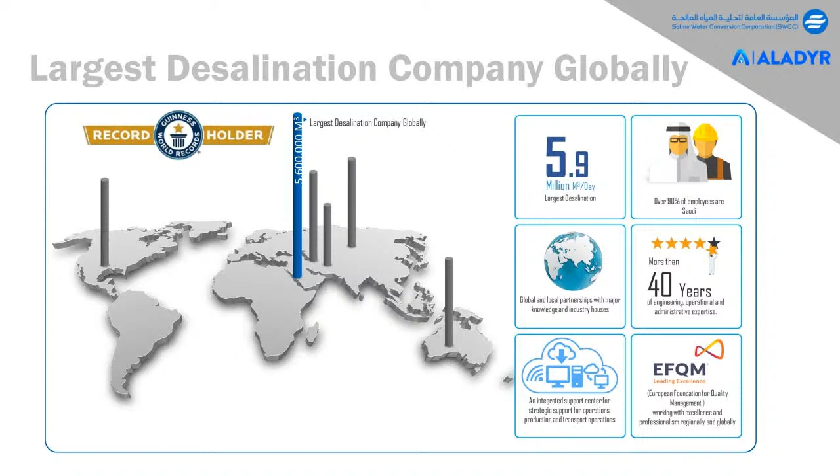This is the record Guinness for when we got 5.6 million meter per day, and now we are producing about 5.9. Now we have experienced more than 40 years in engineering, operation, and administration experience in the desalination industry, and we are a global and local partnership with major knowledge and industry houses.

The main strategic initiative for SWCC is optimization of desalination plant operation, in order for example to increase production. In 2018, we could increase production from 3.6 to about 5 million meter cube per day through several initiatives in the thermal and RO plants, and we could also reduce chemical consumption in the RO plant and thermal plant.

The other strategic initiative is development of new desalination technology and membranes. For example, we have patented several technologies, like using nanofiltration ahead of the RO, which we do as a pretreatment. And the last thing is development of the brine mining technology, what we are talking about today.

The DTRI initiatives in desalination: first, we are focusing on producing more fresh water from the same saline sources by increasing the high recovery from the thermal plant or RO plant. Second, advanced membrane technology and materials.

Now we are working with our partners on a novel membrane that could lead to higher production by about 10% compared to existing membranes available in the market, lower energy consumption by about 10%, and higher rejection compared to other membrane manufacturers. The rejection now ranges from 99 to 99.85, and with our new membrane we could reject about 99.93. This is a uniqueness from our work with partners in membrane technology.

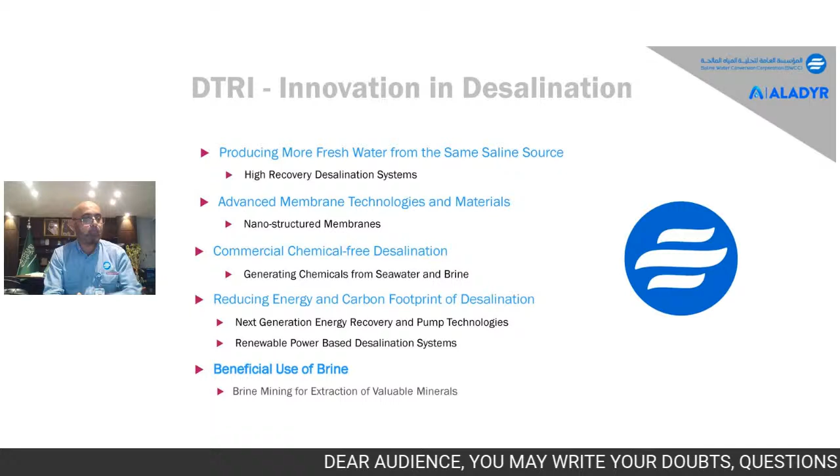As you see, the blue blocks show us the seawater. The seawater actually contains 95.5% fresh water, and only about 4.5% is salt. If we look closely at the 4.5% salt, it will be mainly chloride at 51%, sodium about 35%, whereas sulfate and others make up the remaining. Here we found the value for the minerals and salts available in the brine or seawater.

As you see, all SWCC plants, or worldwide plants, have a brine rejection of about 7% concentration that gets dumped back to the sea, and this is considered a waste. Now we could convert this waste into a treasure by increasing the concentration from 7% to about 25%, with a purity of 99.7%.

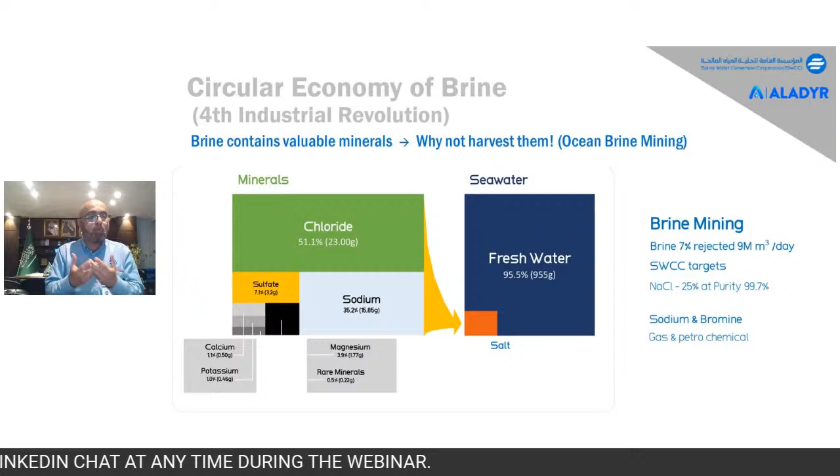I'm talking about the sodium chloride, and my colleague will explain in details, but that's our target. We can make the brine waste into a valuable material. For example, as I mentioned, sodium chloride, 25% with a purity of 99.7. And also we are harvesting bromine for gas and petrochemicals.

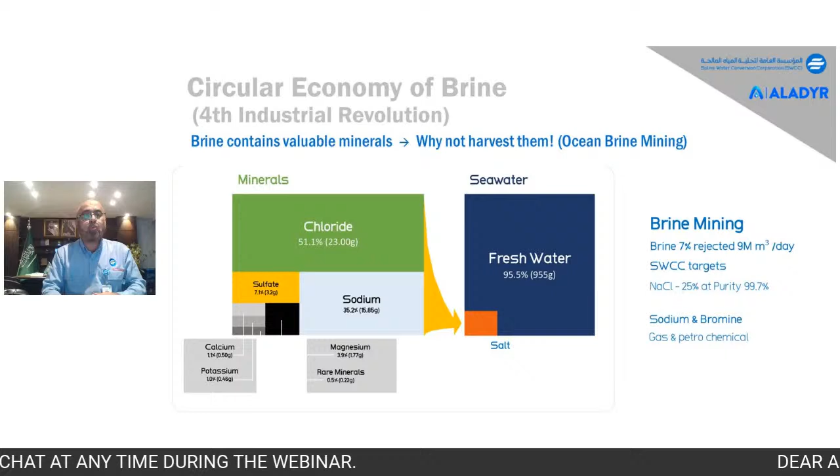For our area, we have SABIC, the biggest petrochemical industry in the world. They need the salt for chloralkali. They used to use landfill in order to extract this salt, but the landfill is not sustainable as what we have now from the brine. Now it's become more sustainable when we are harvesting the sodium chloride from the brine.

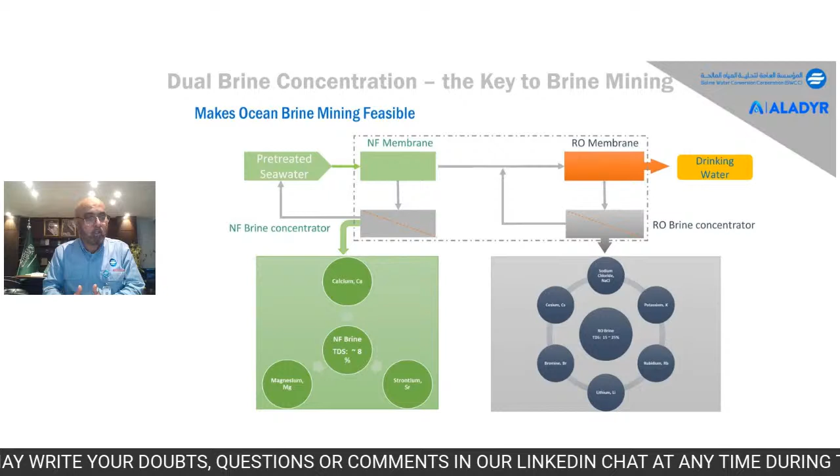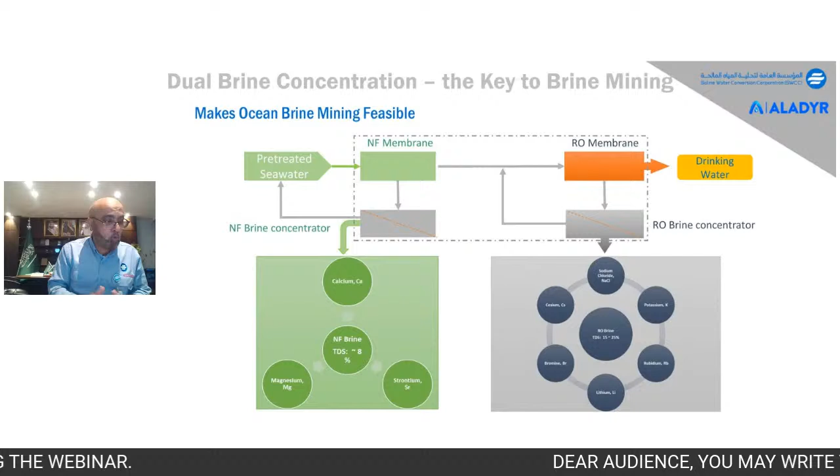Let us focus now on the advantage of having only the monovalent ion going to the RO, since we could increase the recovery for the RO membrane from 45 to about 55%. We have now 10% more recovery. Also, the brine we get from the RO membrane is mainly monovalent, sodium chloride, bromine, lithium, rubidium, and the other stuff.

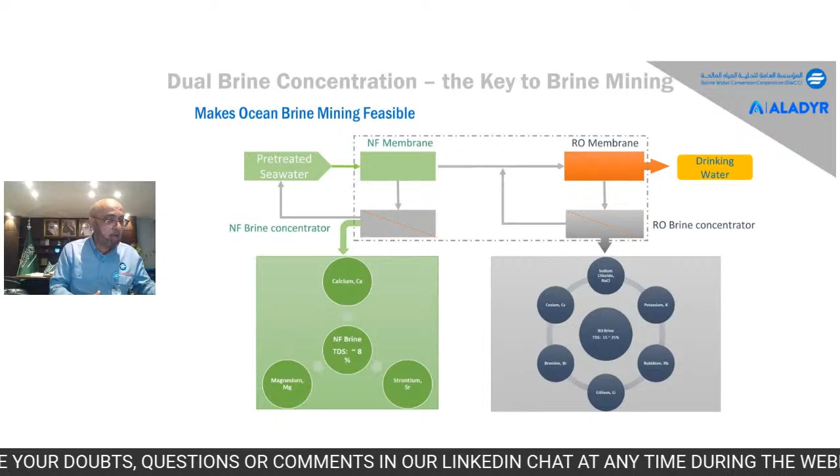Whereas when we go to the NF, the reject of the NF is mainly focused on calcium, magnesium, and strontium ions. My colleagues will talk about the calcium and magnesium harvesting, but I'm going to focus only on rubidium for the monovalent ions. Please, next.

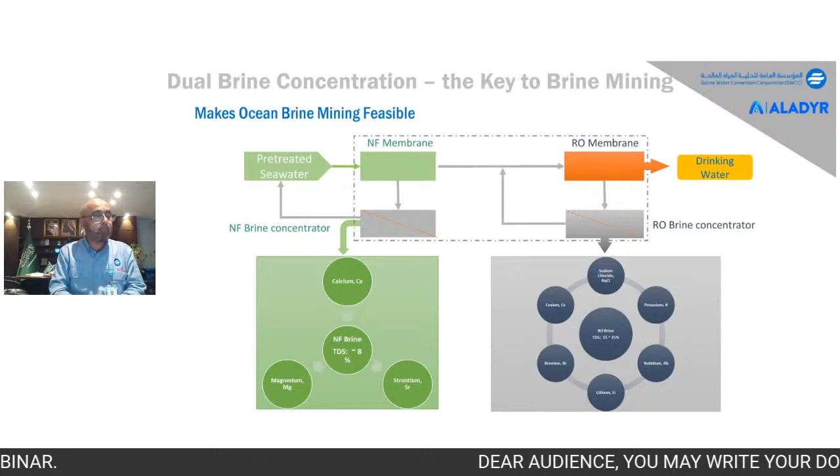For the rubidium, actually now we are working with... next please, sorry, next please. It's the previous, yes, okay.

Now we are working on a project developed in collaboration with the Oak Ridge Lab in the U.S. Department of Energy, in order to harvest the rubidium and put it in the cold fusion power reactor to produce clean energy. This will allow us to produce energy equal to 1.5 or 2 times the energy needed for operating the desalination plant. We believe the extra energy can be exported for household use, and we consider it a revolution in the energy sector because it is green energy.

We are using rubidium with no radioactive waste, and it will be one of the green, stable, and sustainable energy resources because it is from the brine. We believe this is the future of green energy, the bounty of the sea.

We are working now with our partners. We hope that within a maximum of 2 years we could generate power from this rubidium extraction.

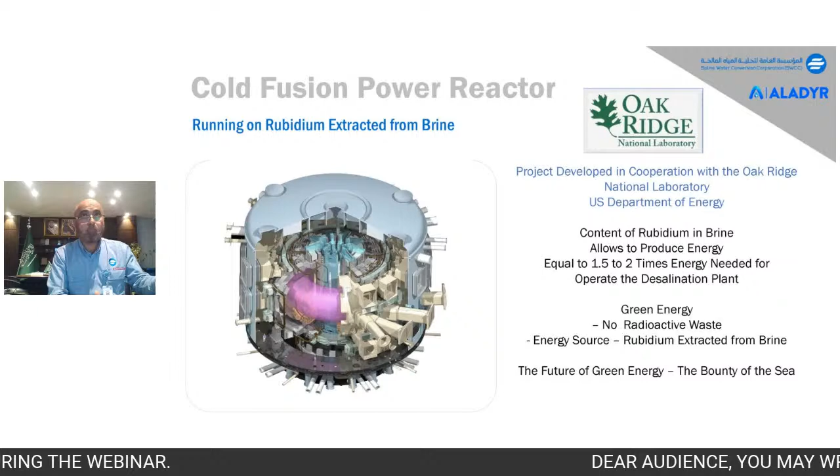Please, can you go to the previous one, please? To the previous one, not the next. No, the previous, please.

We are working on all this type of ion harvesting with our partners, like Hydronautics, Fitco, FTS company, a Russian company, and also the King Abdullah University of Science and Technology. All these are our partners, and also BWS, Pacific Water Solution.

We are working with Oak Ridge Lab in order to make this succeed. We have now succeeded for several projects, for several elements and metals, and our colleagues will explore what we are going to do, inshallah, in the future. Next, please, next please.

The next slide will show you that harvesting from the brine of the NF, the magnesium ions, could give a revenue of more than $160 million, and also from the other stuff, from the bromine, about $10 million.

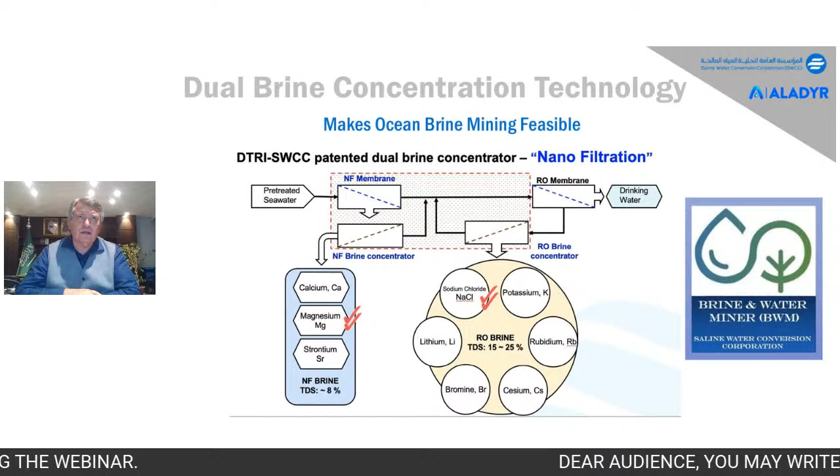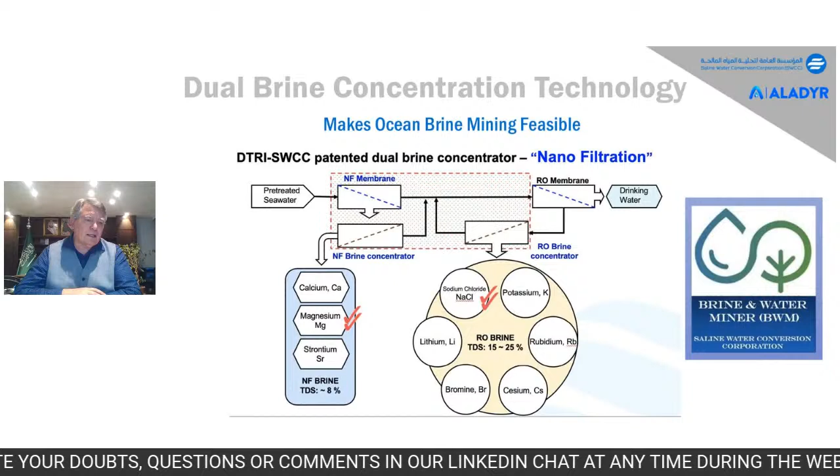From that point on, we treat the water through a conventional seawater reverse osmosis system, which allows us to produce brine that is mainly sodium and chloride, along with a few other minerals removed through the desalination process. This system, shown on the screen, is actually patented — it was awarded a patent later last year. This system is at the core of the design of the full-scale plant we plan to build in Jubail. It is connected to a new 1 million cubic meter desalination plant, also located in Jubail. This is one of the largest projects under development here with Saline Water Conversion Corporation. The brine from that facility will be used to produce sodium chloride and bromine for the chlor-alkali industry. Next, please.

Why do we focus on sodium and chloride? As you can see on this graph, it shows the various compounds present in reasonably large amounts in the brine. The line roughly in the first third of the screen shows that not all of them are cost effective. This graph shows that anything on the right side of the line is actually more cost effective today to derive from brine than from terrestrial treatment of sources of the same mineral.

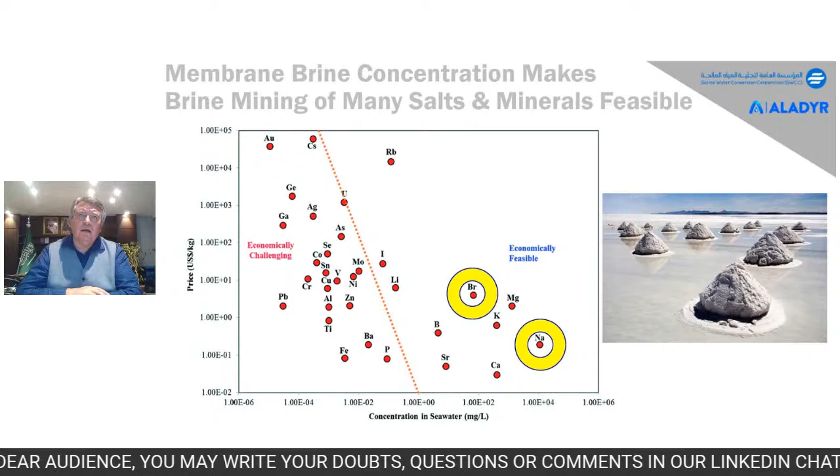And the higher we go on that graph, as you can see, rubidium is a very high value substance. And it's one of the big prizes that Dr. Alamoudi said is not only high in value, but also high in potential in solving the potential future of energy from desalination. The two minerals that I'll focus on are shown with yellow circles, and those are

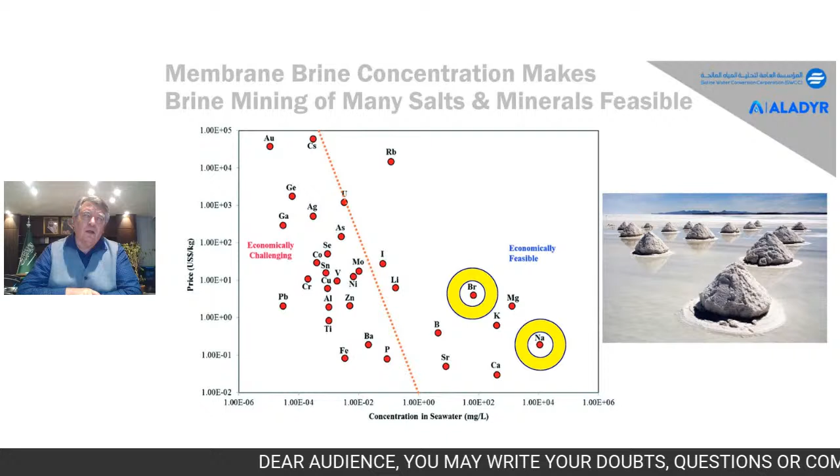sodium chloride and bromine. Sodium chloride is an important substance, and it's used in chemical industry worldwide by the chlor-alkali industry to produce sodium hypochlorite and sodium hydroxide. Bromine is a very important substance for any place where you have oil industry. It is injected in every single oil well as a fire retardant. So it is widely used in the Middle East and many other places worldwide where oil exploration is achieved.

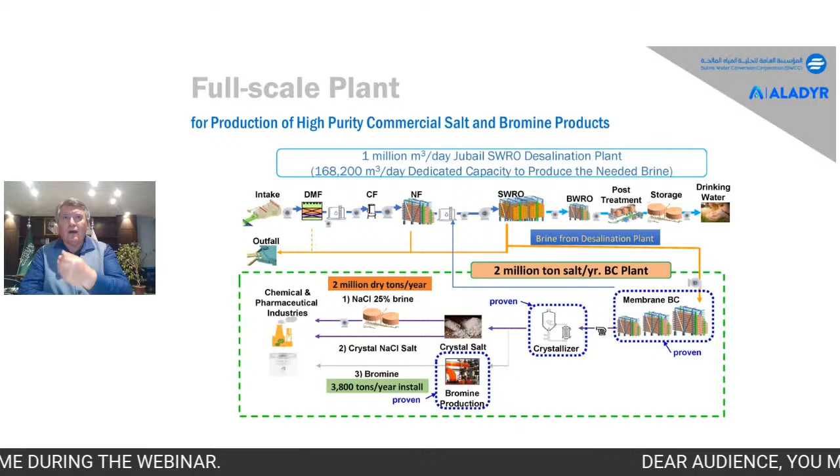The seawater reverse osmosis system will have higher recovery because of the pre-treated NF water. The brine generated from that system will be higher in sodium and chloride and lower in calcium and magnesium. That brine is harvested and goes into a multi-stage brine concentration system, which you can see on the right side of the picture.

The brine concentration system has the purpose of taking the 70,000 milligrams per liter brine and concentrating it to about 232,000 milligrams per liter. This is done by osmotically assisted reverse osmosis, a 3-stage system that operates at low pressures, not as high as the pressure of reverse osmosis. It's very simplified compared to many other systems available on the market.

That allows us to very energy efficiently and cost effectively produce brine at 230,000 milligrams per liter. That brine at that concentration goes into a crystallizer because most of our clients prefer, rather than carrying brine with water in it, to actually crystallize and use it as crystal salt. So that's how we produce the actual brine in crystal form.

We'll also have it in liquid form. We do have one user very close to us, and the brine will be pumped to them directly by pump station. What else comes out of the crystallizer, in the waste or purge from the crystallizers, is actually a stream very rich in bromine that normally would be wasted, as happens in zero liquid discharge systems. In our case, it's actually a very valuable resource of bromine.

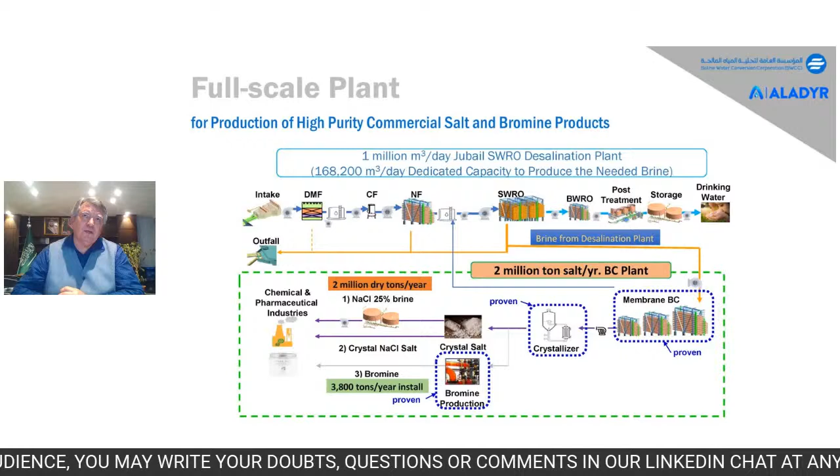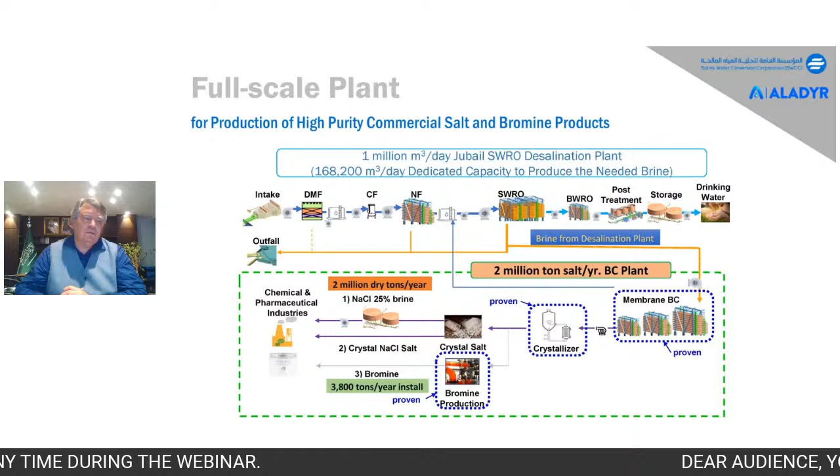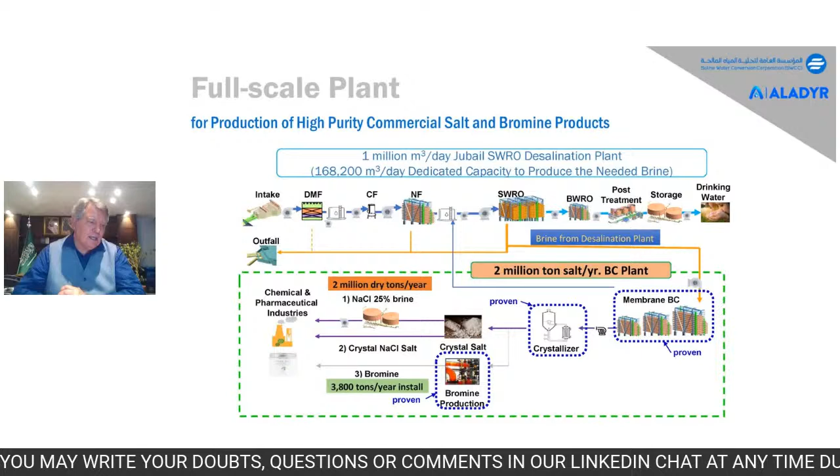We're using a technology that allows us to extract the bromides from this liquid and turn it into bromine, which is a highly valuable commercial product for the chemical industry. As a final product of this plant, we will have 2 million tons per year of high purity salt, sodium chloride, that can be used for the chlor-alkali industry, and about 3,000 to 4,000 tons of bromine per year that will be used for the oil industry.

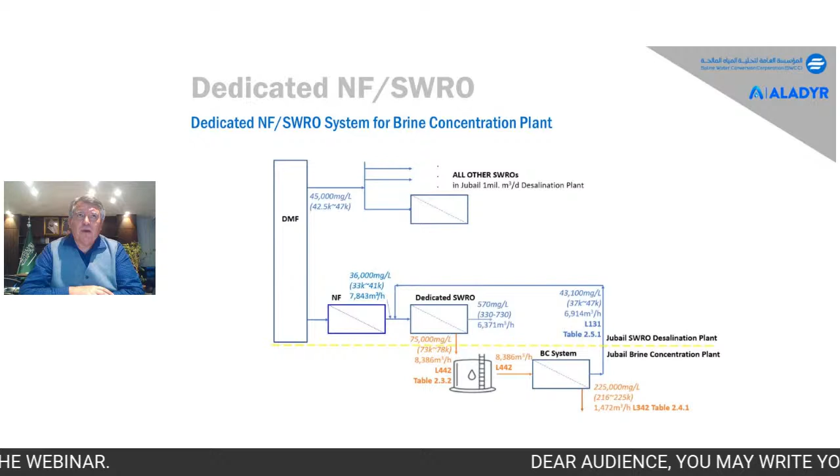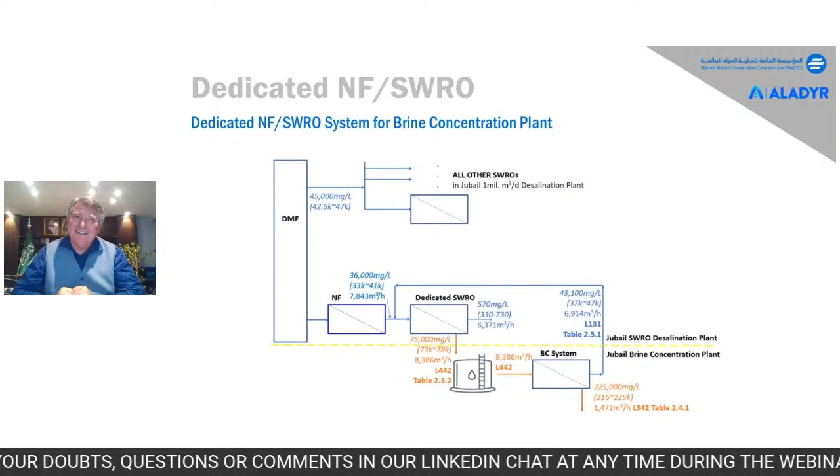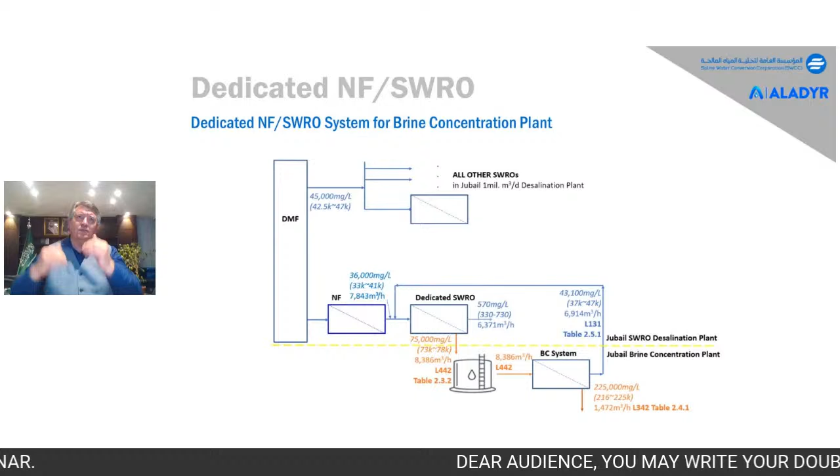The main difference between brine concentration membranes and seawater reverse osmosis membranes is that brine concentration membranes are designed to concentrate brine, and the permeate they produce is actually pretty close to the salinity of seawater, not drinking water - that's a big difference. That permeate is almost 99.6% pure sodium chloride. Recycling and recovering that stream is very valuable in reducing the overall energy and increasing the overall productivity of the system.

Once we do that, the brine that comes from the reverse osmosis system will go into a storage tank, and from there into the brine concentration.

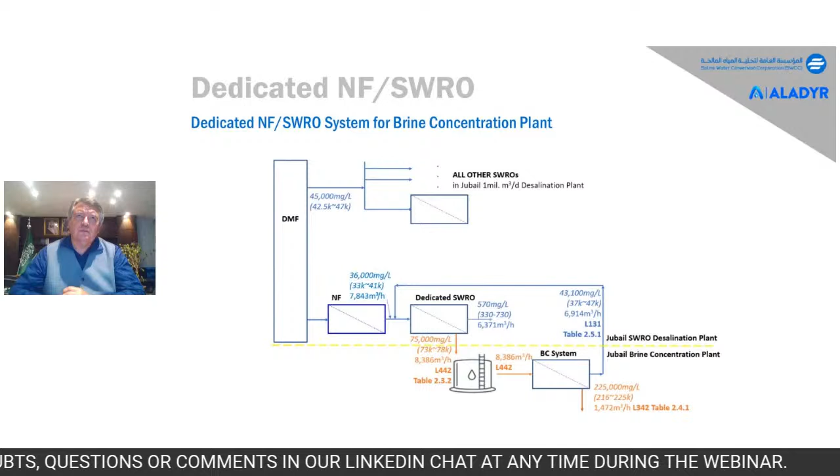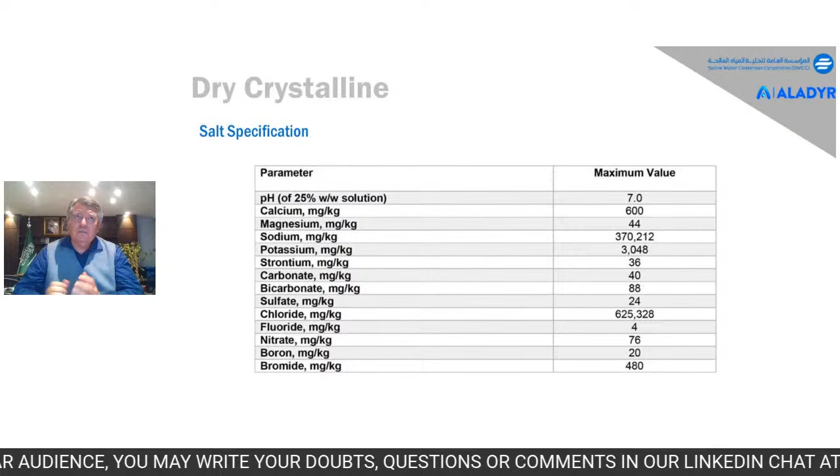Next slide, please. This is the dry crystalline salt specifications. Those specifications are determined by the chlor-alkali industry. You can see what spec we're meeting. We could be even more stringent as far as quality, but this serves basically any chlor-alkali industry use of this brine, and also medicinal, pharmaceutical, and other industry uses. Just to see what the product looks like. Next slide, please.

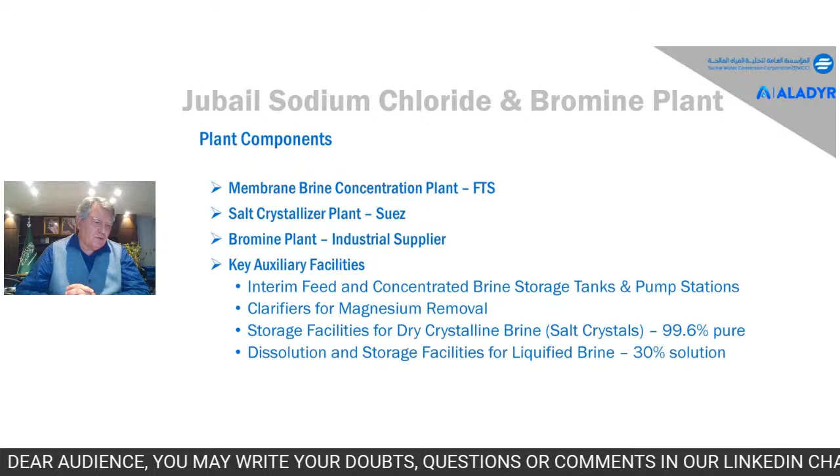The bromine plant is basically provided by an industrial supplier - a fairly readily available commercial facility. Besides the bromine and salt crystallizer, we have interim feed and concentrated brine storage tanks, pump stations, and clarifiers for magnesium removal. The brine tends to change in quality because seawater changes in quality as well, so we use the clarifiers to remove extra magnesium in summer when membrane rejection is not as high. Then we store the brine in liquid form.

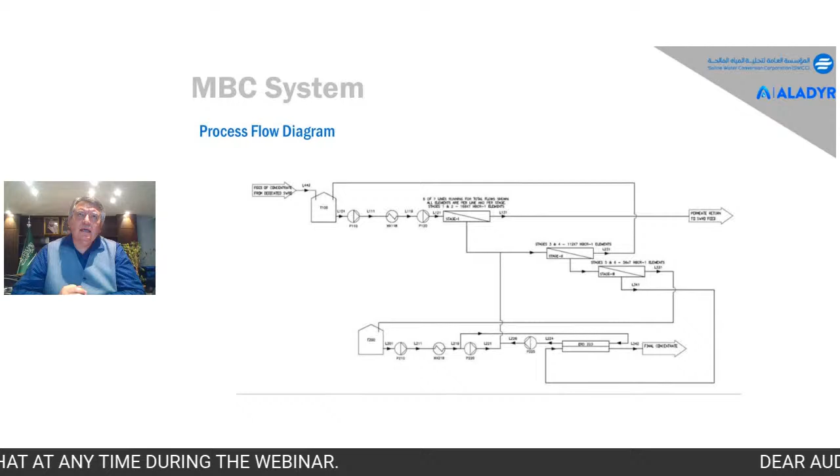This is the membrane brine concentration system, just a general schematic. I'm not going to go into detail - you're very welcome to come to our one-day brine concentration conference workshop, where for one day we'll talk in excruciating detail about the chemistry, technology, and details.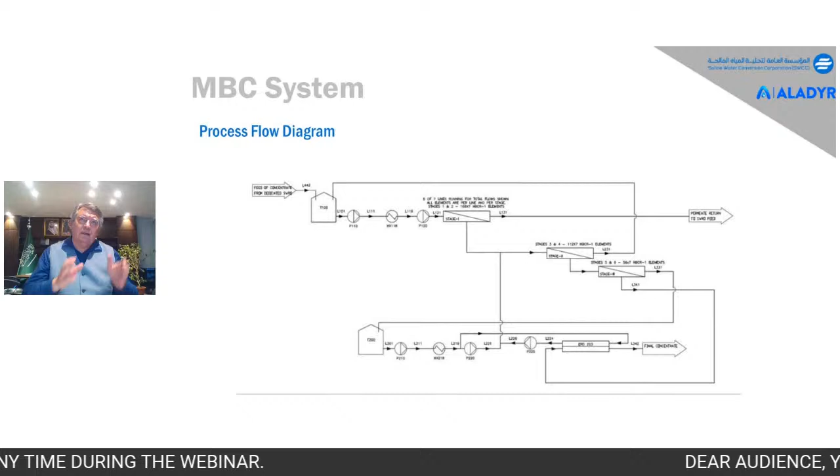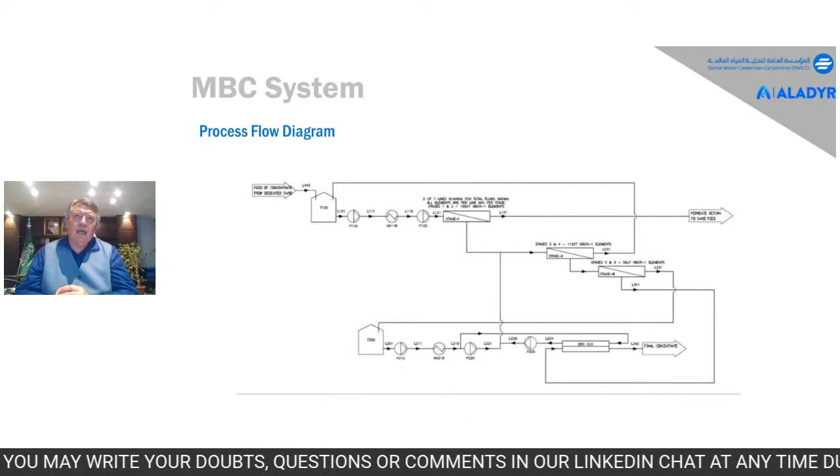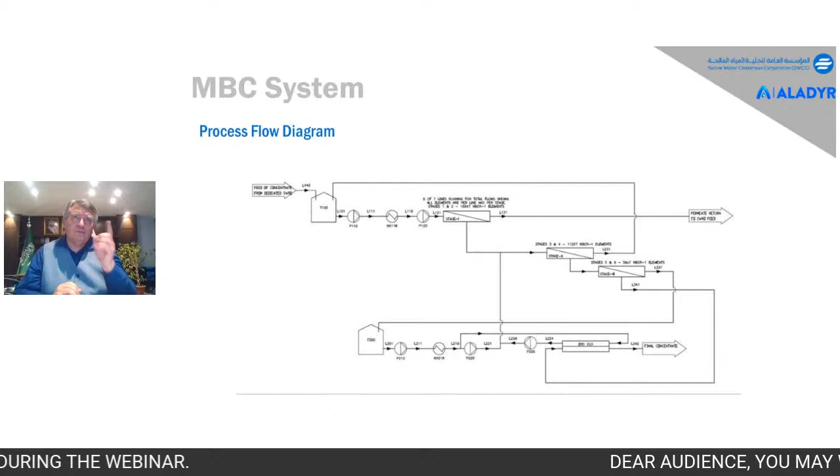This is basically a three-stage system where we treat the brine to concentrate it. From stage to stage we increase the salinity: feeding at 70,000, we get to about 150 to 180,000, then to 230,000, and with the third stage we could get to 280,000 milligrams per liter. The permeate from each brine concentration stage is recycled to the front, while the permeate from the first stage is recycled to the feed of the seawater reverse osmosis system.

Next slide. The crystallizer system - I wanted to mention that particular system. We selected a different system from the ones used in zero liquid discharge systems, because we wanted to create high quality dry crystals suitable for the chlor-alkali industry.

We are using specific SWCC technology, which allows us to meet all our targets and also produce high quality bromide that we could extract and convert to bromine for the benefit of the bromine industry. The crystal salt we produce is 99.6% purity sodium chloride, 6,000 tons per day - that's 2 million tons per year. We also generate about 30,000 m3/d of low salinity condensate that can be reused. In addition, we create about 3,780 cubic meters of purge with high concentration of bromide, which then goes through a bromination process to turn into bromine, a commercial product used in the oil industry.

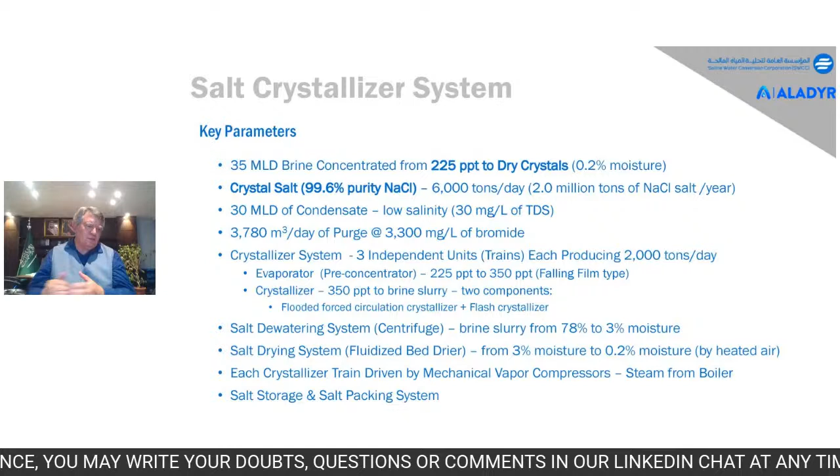The crystallizer system has 3 independent units with a pre-evaporator, pre-concentrating the brine from 230,000 all the way to 330-350, and from there crystallization into fine size 0.2% moisture crystals. We also have dewatering and drying components, including a fluidized bed dryer, as part of the crystallization system. We run the crystallizers using steam and mechanical vapor compression, and we also have salt storage and salt packing systems as part of the project.

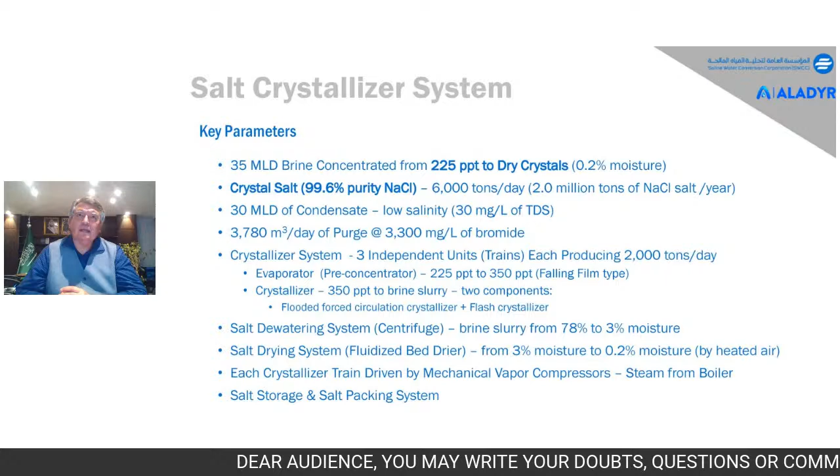Next picture, please. Next slide.

The next steps of this project are: we've completed the front-end engineering design of the project, and we are currently securing the funding of the project. We expect that to be completed within the next 2 months.

And then we have a project workshop that I mentioned in our brine mining conference, on March 21st. You're welcome to attend, and it is included in the price of the conference, which is very reasonable.

From that point on, we will get into preparation of requests for proposals and issuing proposals this summer and fall, and have a turnkey contractor design and build the facility to great detail. Then a construction period of about 36 months, with expectation by mid-2025 to have this 2 million ton per year plant in operation. This will be the largest facility in the world that makes this type of brine.

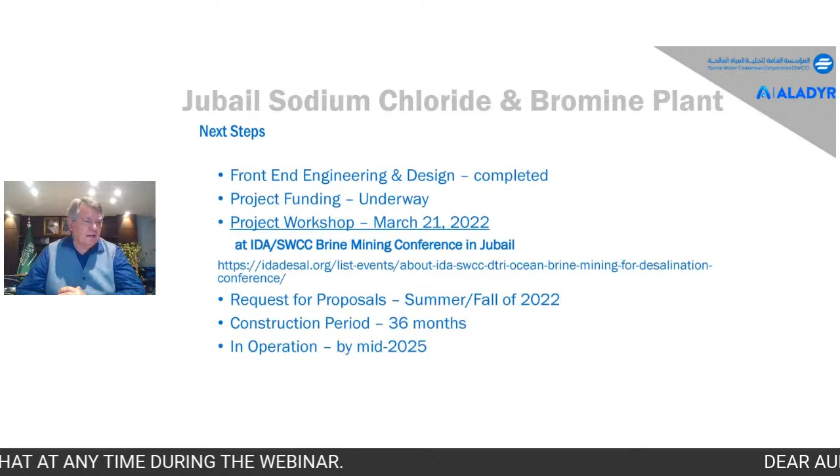Next slide, please. With that, I'd like to thank you for your attention, and to remind again that the Ocean Brine Mining Workshop is on the 21st of March. If you're interested in learning more technical details, we have a one-day workshop associated with that.

So with that in mind, I'd like to invite you to visit us here in Jubail, where you'll also be able to see the actual pilot system being used to verify the performance of the full-scale plant. Thank you very much for your attention, and we will continue with the next speaker.

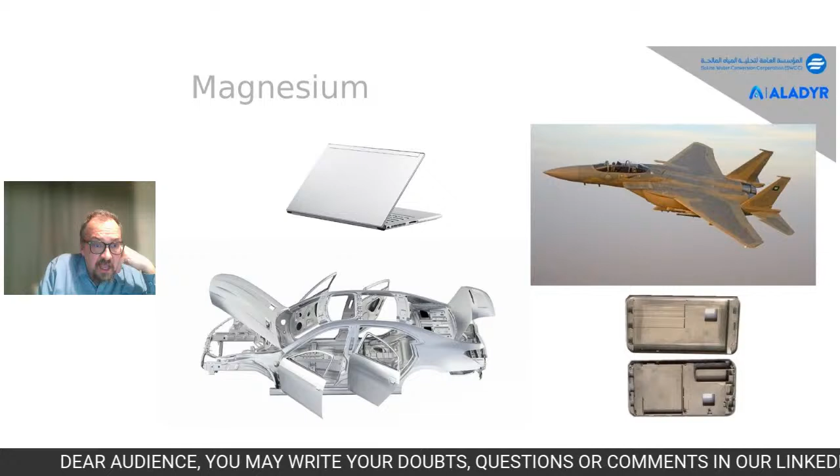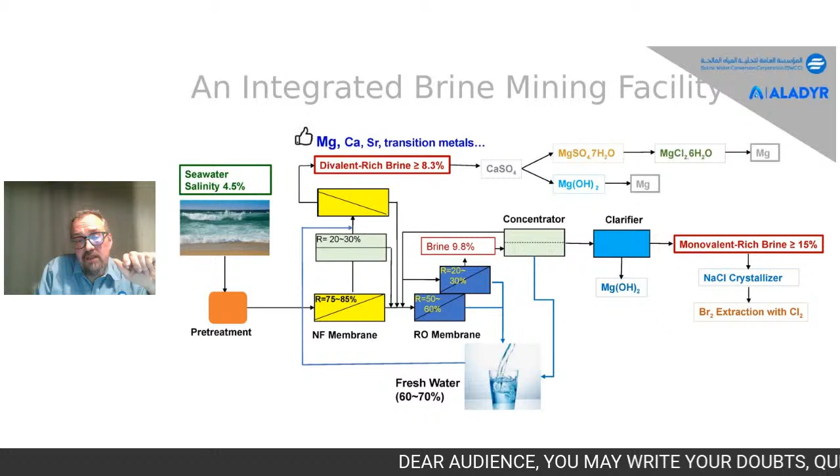So our integrated brine mining facility, on the next slide—Engineer Voutchkov has talked about how we're going to produce sodium chloride and bromine from this—but we also have another stream we haven't done anything with yet, which is that divalent rich stream, the reject from the nanofiltration membranes. Now this is a potential source for magnesium metal and for these valuable magnesium salts.

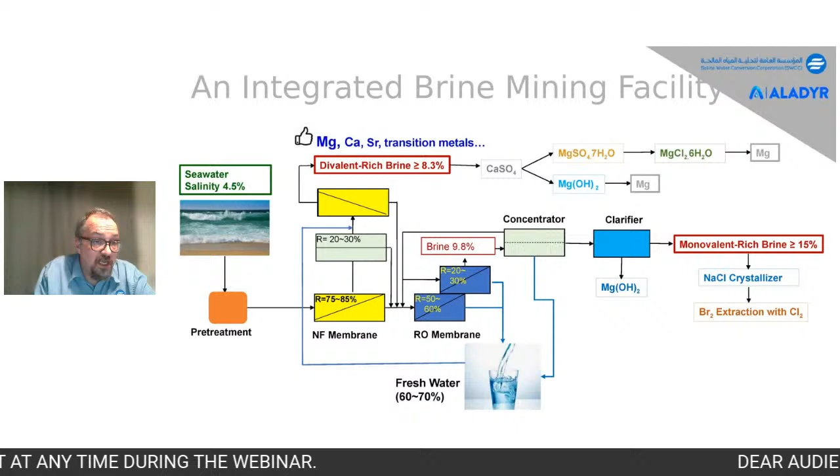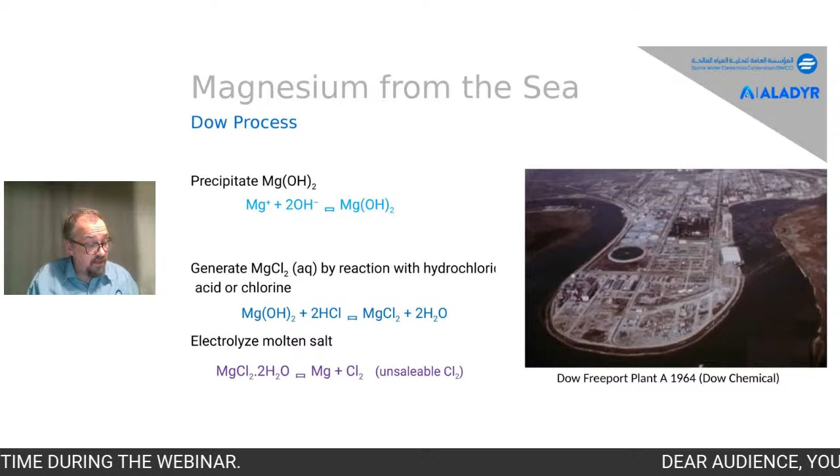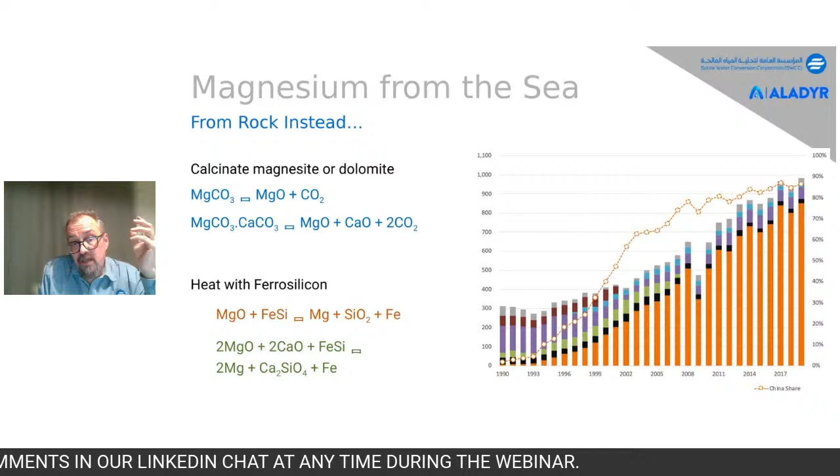There is a similar process which was also applied in many parts of the world throughout the 20th century. But since the late 1990s, these processes of getting magnesium from seawater have been almost entirely replaced by a much more polluting and energy intensive process that makes magnesium from terrestrial sources.

So the question is, how can we match the low energy, low cost of these processes used to produce magnesium from the land? We don't want to add large amounts of reagents, as in these historical processes, to precipitate magnesium hydroxide. We don't want to put in large amounts of energy if we can possibly help it.

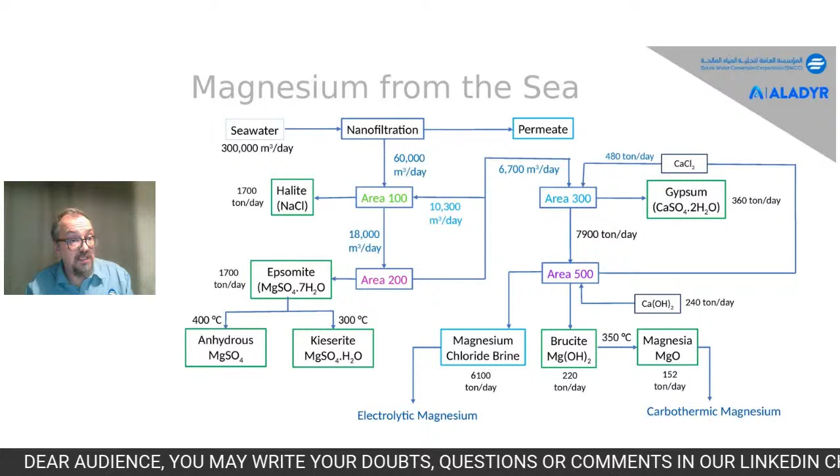And it's also possible that we can economically produce magnesium metal from the magnesium chloride brine that is potentially produced from the nanofiltration stream. So this is our low chemical impact design that we're working on at the moment for extracting as much value as possible from the nanofiltration reject. And the magnesium metal, if we have an interested partner, is obviously an ideal product there.

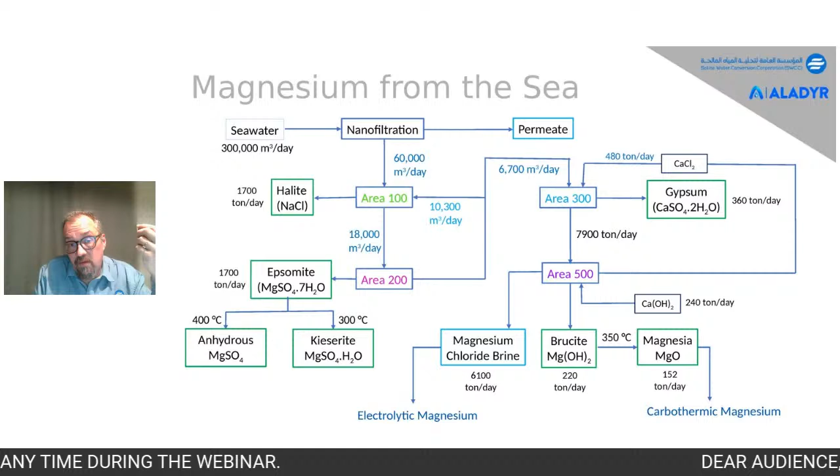Other products for which there is a significant market are the magnesium sulfate salts. The various forms shown there are quite valuable fertilizers. And in the next presentation, Dr. Eam will be telling you about a slightly different take on magnesium sulfate that we're actually implementing at the moment.

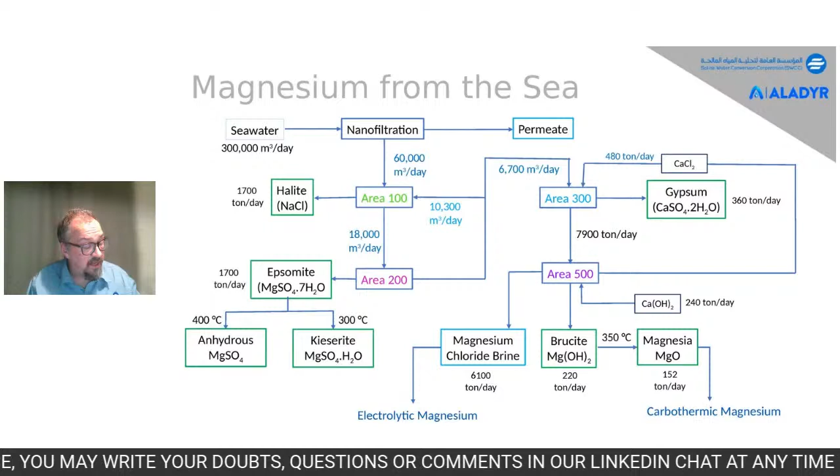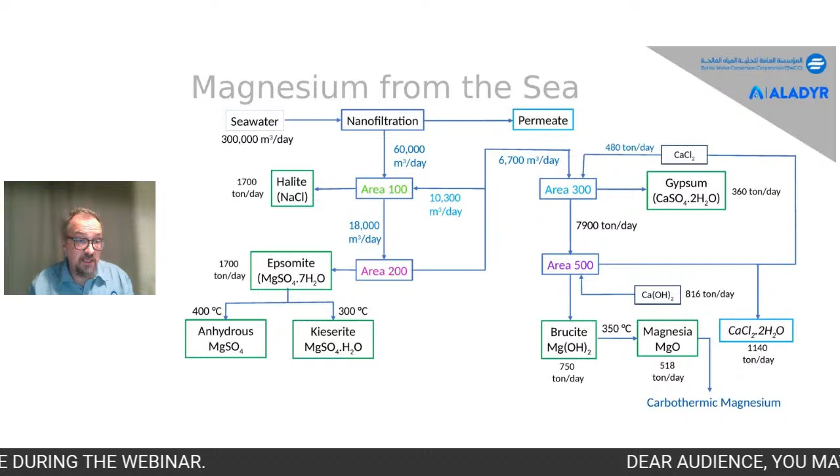So this plan maximizes magnesium chloride output. The next slide is a slightly different proposal for maximizing production of magnesium hydroxide for production of carbothermic magnesium. And we're currently talking with various people to identify the best path forward to produce magnesium.

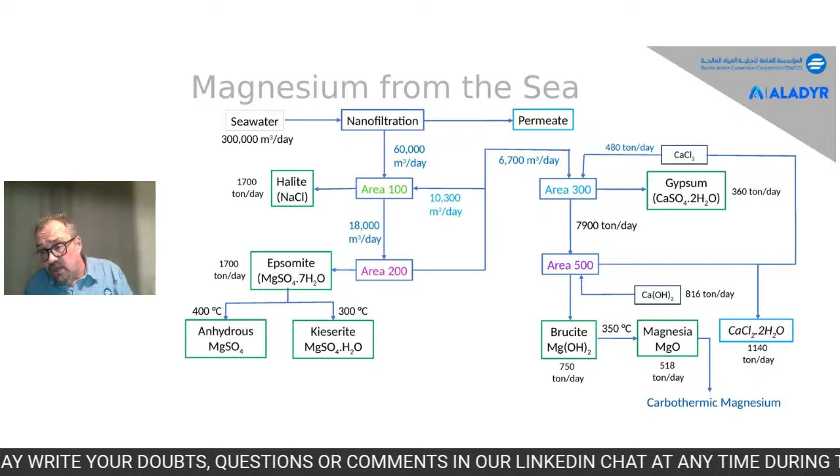So I have a little bit of time, despite the technical difficulties, to tell you about some of the other things that were significant on that graph. And the first one is potassium salts. Potassium is also valuable as a fertilizer.

Currently in the Kingdom of Saudi Arabia, we have no internal sources of potassium fertilizer. It's all imported from Jordan. And the output of our 2 million tons per annum sodium chloride plant will very neatly match the demand for potassium fertilizer in the kingdom. It could be reacted with the magnesium sulfate that's produced to produce potassium sulfate, which is a higher value fertilizer than potassium chloride.

Dr. Alamoudi spoke briefly about rubidium. So this is the actual technology that will use rubidium is still very much hidden away in the dark labs of the U.S. Department of Energy. But if these do become commercial, or even have significant use in government applications in the kingdom, then this future market for the rubidium 87 isotope will be very good for us. This can be extracted from the purge.

So I should have said about the potassium chloride, once we take the bromine out of that concentrated purge that's left over, it's a very good source for potassium chloride. What's left over after that is quite significantly enriched in rubidium.

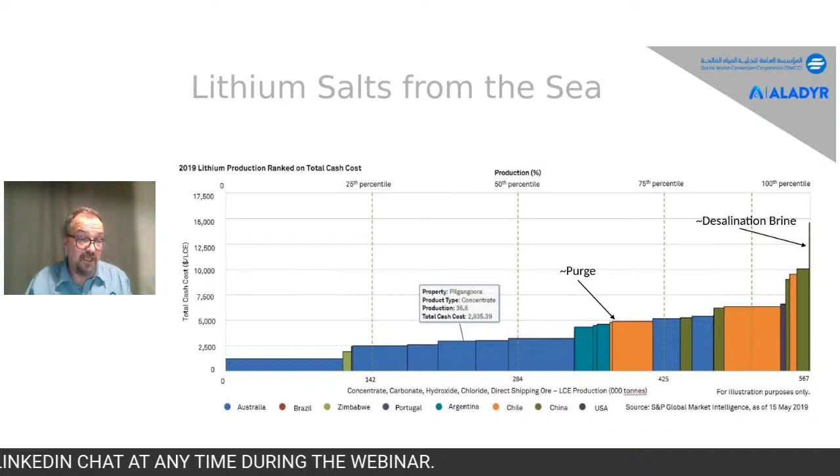So to summarize, we have an exciting future in front of us on the final slide. And we're taking the realizable parts of Thomas Midgley's vision. We're quantifying them and finding the parts that are going to be cost effective for us. The most important thing is separation. Any separation process requires energy and money, and having the nanofiltration at the front end gets us a lot of separation bang for a small energy buck.

And having everything integrated makes things economic that otherwise would not be. So if we didn't have a market for the sodium chloride, it wouldn't be practicable to look into all of these other products.

The sodium chloride is carrying the burden of everything else. And finally, for products like magnesium and rubidium, strategic considerations are important. It's likely that we will have a situation where it might not look perfectly competitive on a pure economic basis, but considering that more than 90% of the world's magnesium, and now the world's only operating rubidium mine, are controlled by China, I think there's an interest in getting those commodities from the sea, which touches nearly every country in the world. Thank you very much.

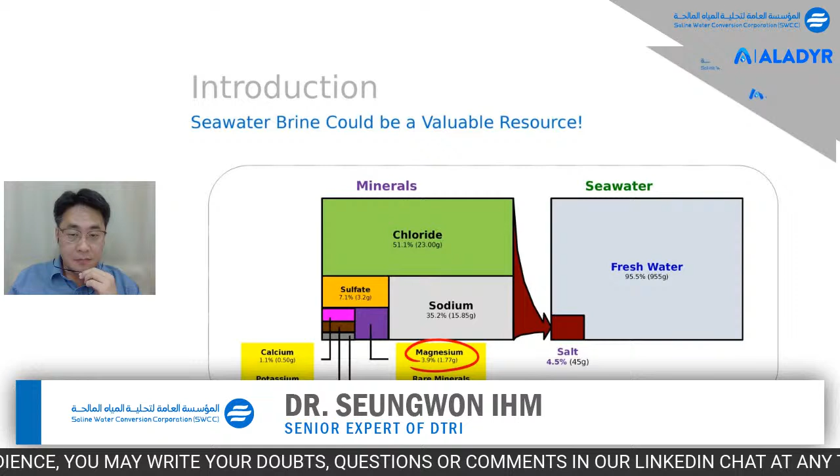Can you see my screen? Okay. Yes, we can see your screen, your presentation. Next slide, please.

As explained before, why magnesium? We found that during the last more than 20 years, in the medical society there has been a lot of study on the impact of magnesium dissolved in drinking water on human health. We found that the magnesium content in drinking water is very essential, very important for human health, especially on two aspects: one related to healthy heart muscle, and another for combating diabetes.

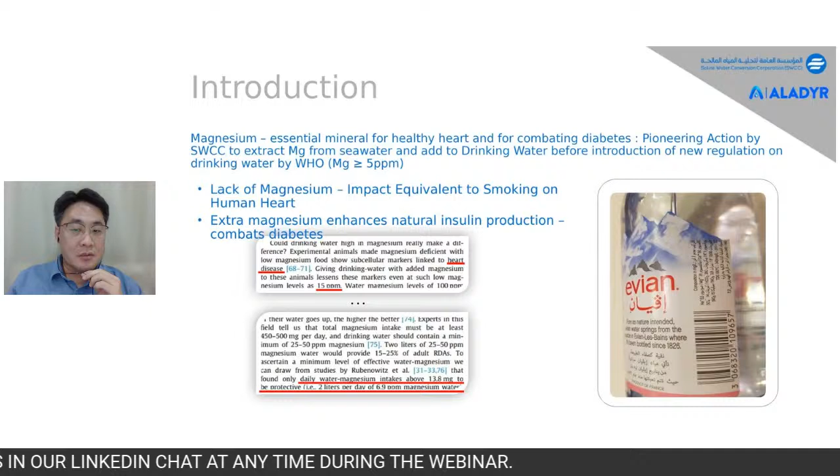Depending on the researchers, they found that the minimum magnesium content in drinking water, for some aspects 10 ppm, or in other cases 20 ppm, is essential. Next slide, please.

So how can we extract magnesium? Fortunately, in seawater we already showed that magnesium is the number 4 most abundant mineral available. So when we have a seawater desalination plant, why don't we extract the required magnesium from the seawater? In the Middle East, usually there is 1,500 ppm magnesium in seawater, and we need only 25 ppm magnesium in our drinking water. So we considered using nanofiltration in this application.

Nanofiltration is very special. Sodium chloride, such monovalent ions, mostly pass through the membrane, while calcium and magnesium, the divalent ions which are very important for our health, will be rejected by the NF membrane. Unfortunately, the NF membrane behaves as shown on the lower side of this diagram.

Although we want a certain ideal NF membrane which has zero rejection of sodium chloride, meaning sodium chloride moves with water molecules, in the NF reject where we want to harvest calcium and magnesium in a highly concentrated manner, we still have sodium chloride remaining. So how can we reduce the sodium chloride in the NF reject, so we don't put sodium chloride into our drinking water? We want to inject only calcium and magnesium. Next slide, please.

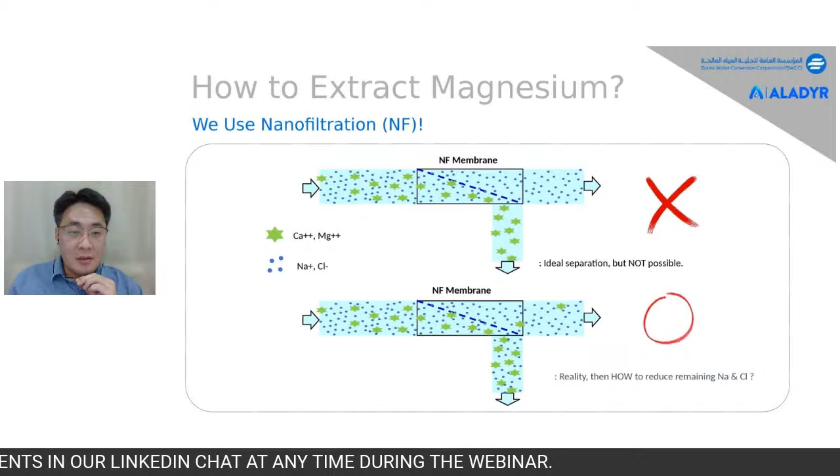We wanted to demonstrate our idea in a real commercial plant, so we developed our project over the last 2 years, and we are implementing this new NF system in the Shoaiba Phase 4 plant.

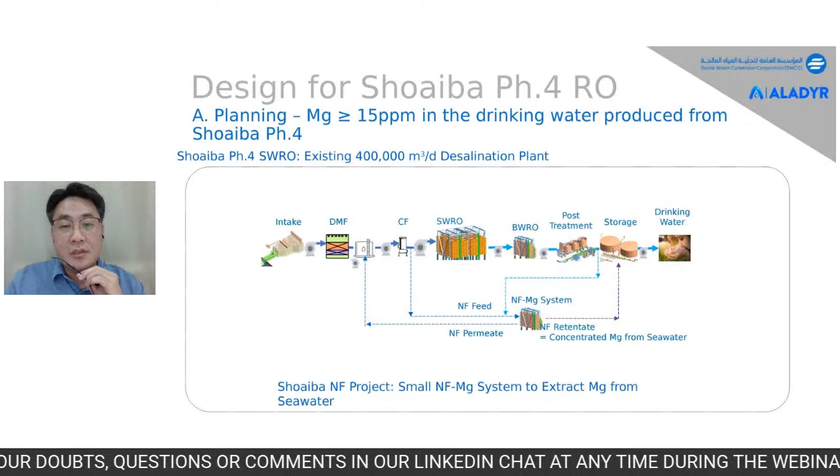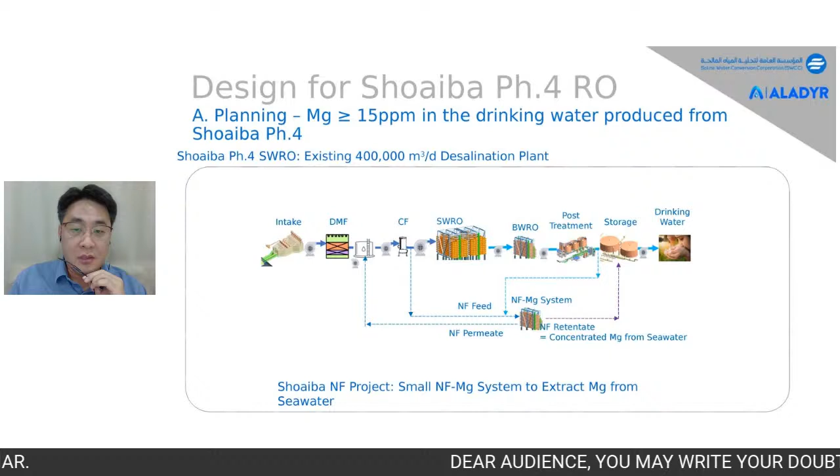We had to carefully choose the type of NF membrane. In DTRI, we have the NF membrane's performance data in terms of each individual ion rejection for more than 20 different NF membranes. NF membranes could be very tight, which is group A.

This is more close to the BWRO membrane, which shows very high rejection. While there are very loose membranes in group C, we tried to find something between group B and C, so that our final NF membrane shows less than 20% sodium and chloride rejection, while keeping a high enough magnesium rejection around 80%.

Next, what will happen in our drinking water? The left-hand column shows the Shoaiba Phase 4 product water design condition.

Usually in seawater desalination, the post-treatment adds hardness by calcium carbonate. So here you can see calcium carbonate, calcium and bicarbonate, but unfortunately, from the desalination plant using either RO or thermal processes, magnesium is usually almost 0 ppm.

In the column in the middle, you can see the magnesium-enriched brine from our multi-stage NF system. Here we can concentrate magnesium to more than 7,000 ppm, while sodium and chloride are minimized.

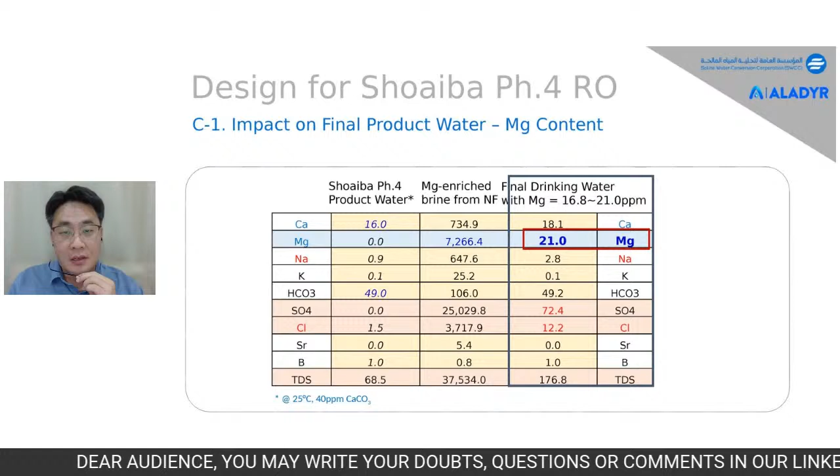After mixing this NF reject with our product water, our target design at 25 degrees Celsius was to secure magnesium at 21 ppm. At higher temperature and after certain membrane aging, this could drop to 17 ppm. But still, this is good for health, because our target was magnesium 15 ppm.

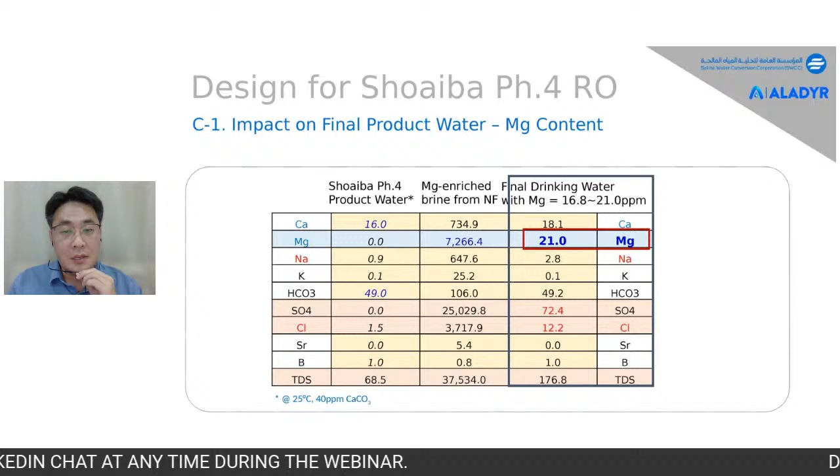Then the impact on Shoaiba Phase 4 water production. In the original design, as a reference, the feed TDS to the seawater RO system was 42,800 ppm.

But when we mix with our NF permeate, which is 13,000 ppm, the seawater RO feed TDS drops to 42,200 ppm, 600 ppm lower. Then we can actually increase the seawater RO recovery from 42% to 42.8% with similar feed pressure of the high pressure pump to the seawater RO.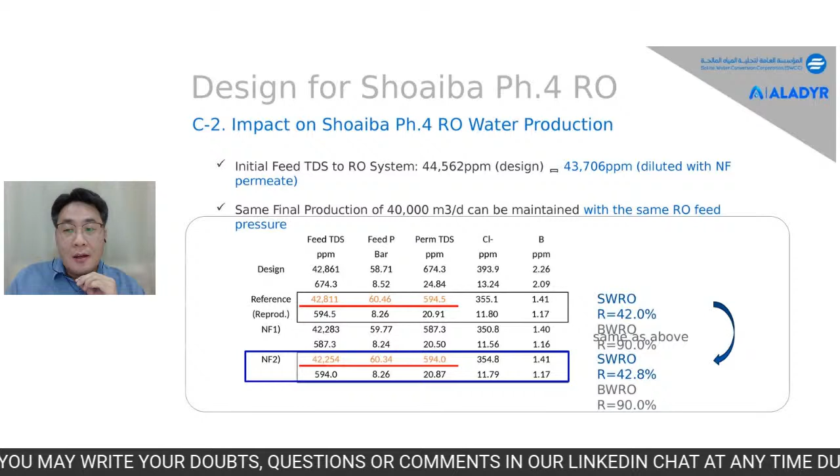So in this way, we can produce 0.8% more recovery, and this additional water production is actually used for our NF multi-stage interstage dilution water, so that although we use dilution water in our NF system, there is no loss in the final product water.

This is the overall scope of supply for our NF system. The overall size is less than 50 meters by 50 meters. We use filtered seawater as a source of magnesium, and product water as a source of interstage dilution, and most of the flow rate is sent back to the DMF filtered water tank.

The energy consumption in our system is around 1 to 1.5 megawatts, which is less than 2% of the entire Shoaiba Phase 4 seawater RO plant.

So the overall scope of our NF system, comparing to the Shoaiba Phase 4 seawater RO plant, is between 2% to 5% in terms of energy consumption, flow rate, or required footprint.

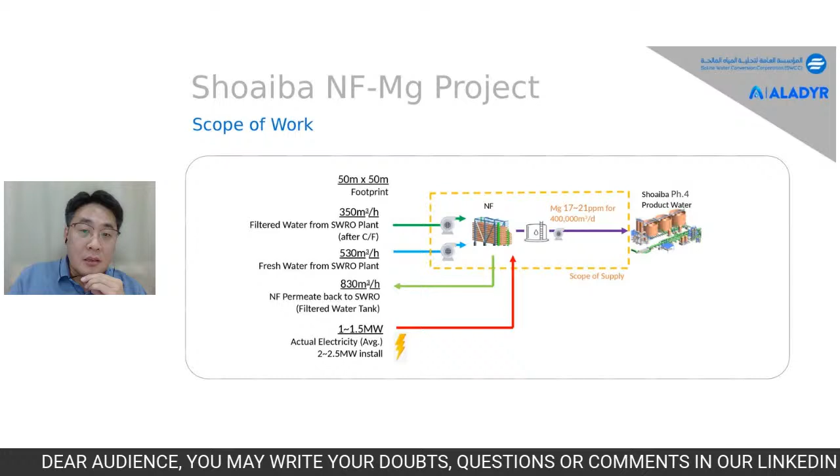So we can say that the possible increase of product water cost for our drinking water will be around 3 to 4% order. With this 3 to 4% additional cost, we can have magnesium in our drinking water.

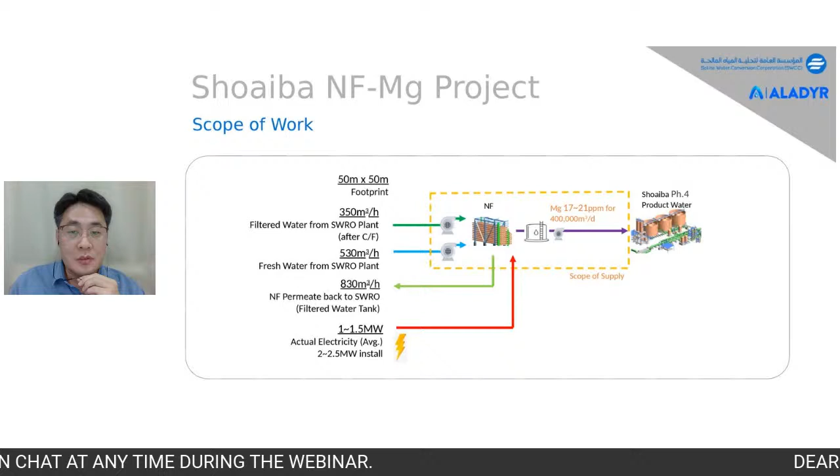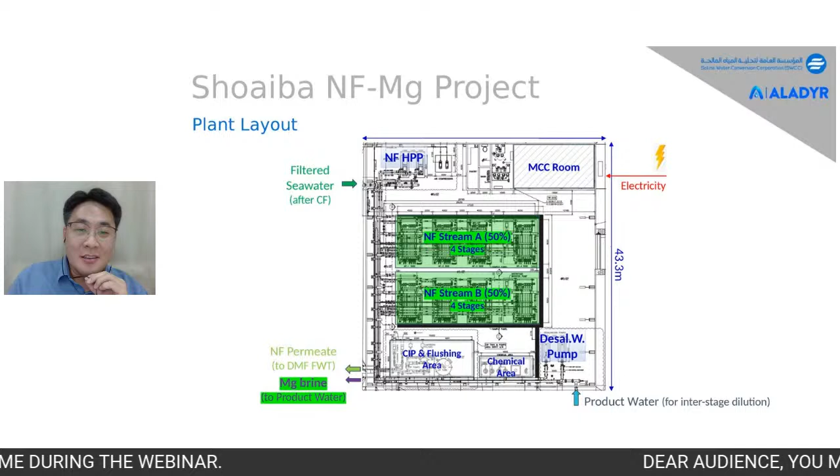This is the NF plant layout, around 43 meters by 43 meters. We designed our NF into 2 streams, each stream containing 4 stages, but these are actually the mini NF skids. So all those 8 NF skids, the total number of pressure vessels is only 210, similar to just one big seawater RO train.

So this is our overall diagram.

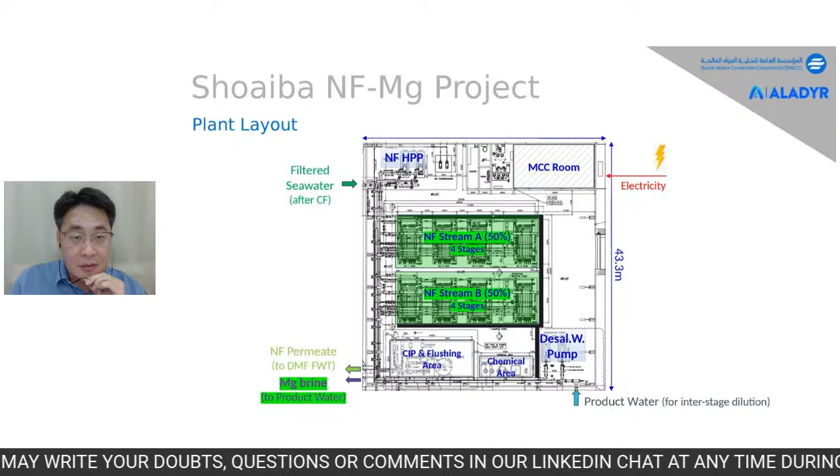After 2 years of project development, last year in May we could award the project to the EPC contractor, and from July last year, just 7 months ago, we started construction of our NF plant. On the right you can see a picture from last month, January — it is almost completed. Right now in February, we are doing the required tests and commissioning works, and we believe that next month, from March, we can enter into the reliability test.

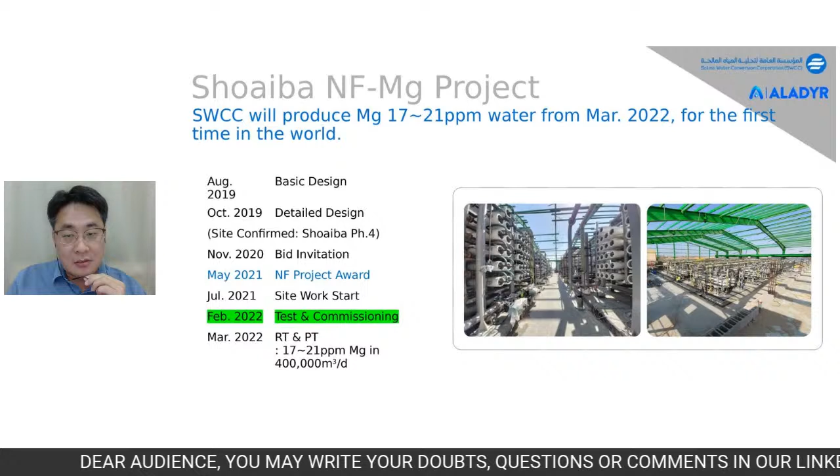Then we will be able to supply concentrated magnesium into the Shoaiba phase 4 plant. We will have magnesium at 17 to 21 ppm in the final product water of Shoaiba phase 4, which produces 400,000 cubic meters per day.

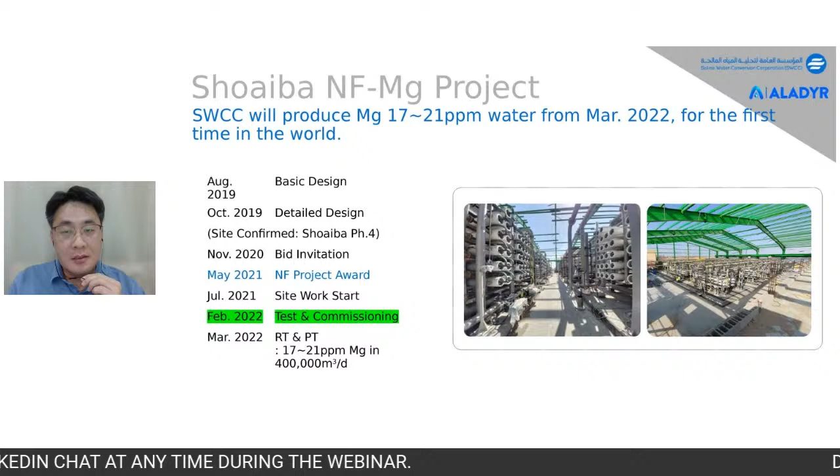So this is the conclusion: SWCC will produce magnesium at 17 to 21 ppm water from next month, and this type of plant will be the first of its kind in the world. We used our multi-stage NF system design. This will be a good example of how to utilize magnesium from seawater for a good purpose. Thank you very much, this is the end of the presentation.